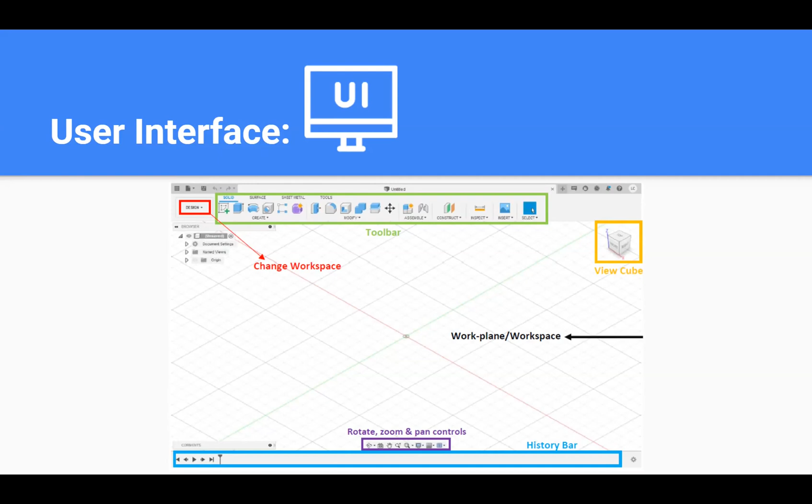Whenever you do something new in Fusion 360, it saves it, so you can always go back to see what you've done in the past. This entire user interface will make more sense once we get started working on our model together.

Fusion 360 has folders and projects, which is how you save your files. The great thing about Fusion 360 is that you can work with multiple people on the same model at the same time, which is perfect for our design-a-thons. If you're working with friends, you can all work together on the same model by saving it into the same project. We'll go over that later today.

If you've never done any 3D modeling before, it's very helpful to follow a step-by-step process so you can efficiently create the models you'd like for whatever design you're making. The great thing about 3D design is there's no one way to do it, but if you want to get started, I suggest following this little algorithm.

It starts with first creating sketches. The next thing is dimensions. Third, we have extrusions, then cutouts, and lastly, colors and appearances. We'll go through each of the 5 steps in this algorithm together through the slides, and then put it into practice later.

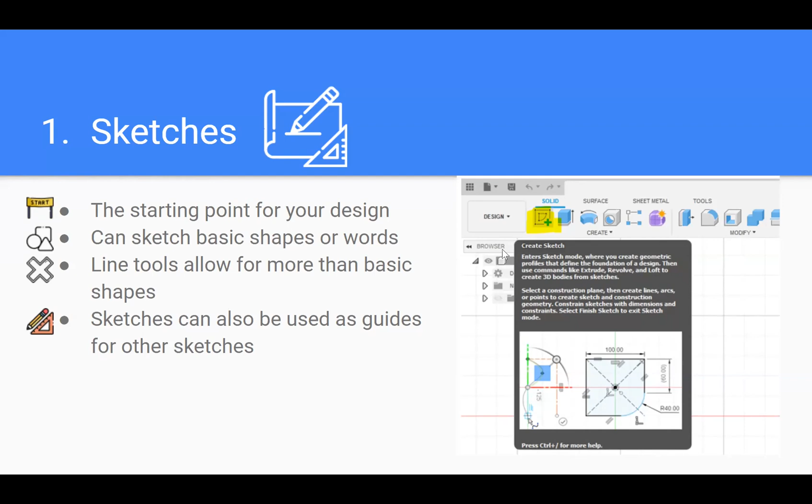Here you can take a look at the different shapes in the drop-down menu, and we'll see more when we work on our model.

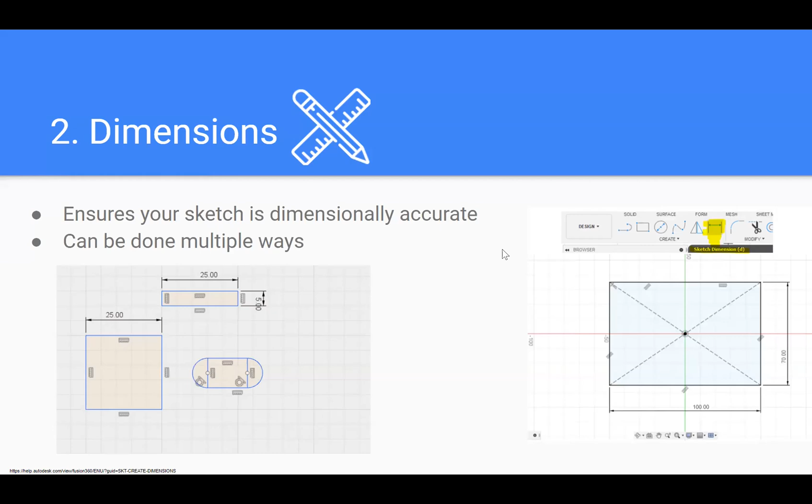So the second step in the algorithm are dimensions. Dimensions make sure that your sketch is dimensionally accurate. There are various ways you can work on dimensions, and I'll show you the most straightforward and intuitive way. If you have to design something that is a specific size, you will define the dimensions - the length, the width, and the height - using the dimension tool. So you typically dimension your sketches and then move on to the next step afterwards.

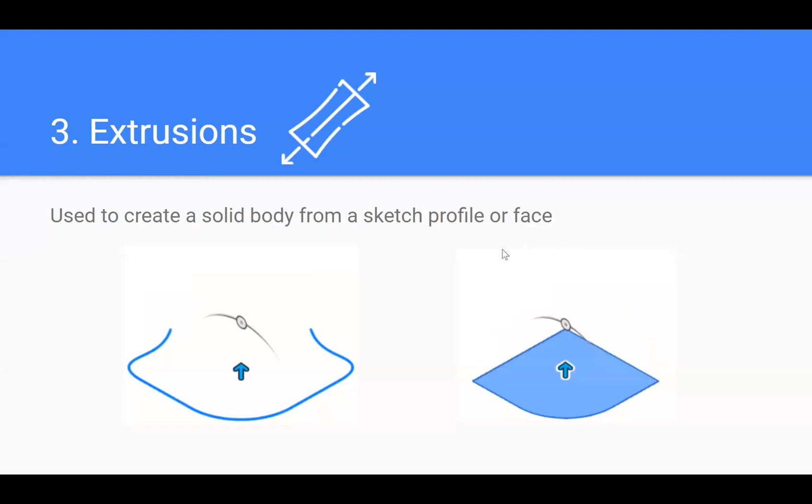So the next step are extrusions. Extrusions allow you to create a body from a sketch. We started with our sketches, we dimensioned them so that they were accurate, and now if we use the extrusion function, you'll be able to create a body from it. For example, if you're extruding a square that you sketched, you would create a cube or rectangular prism once you use the extrusion function. You can see in the animation here how that works.

There are sketches on both the right and on the left, and the body is being created.

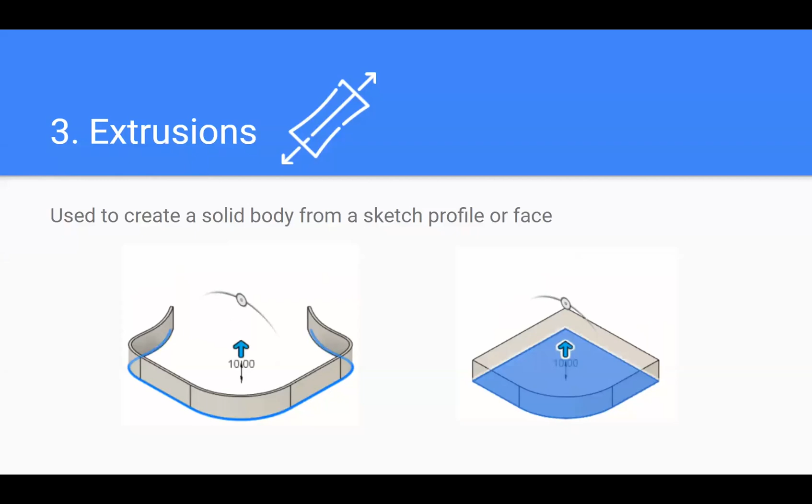The great thing with Fusion 360 is that it's pretty smart in the sense that if you put in certain values, it's able to adjust everything for you, so you don't have to worry about dealing with all of these different types of operations.

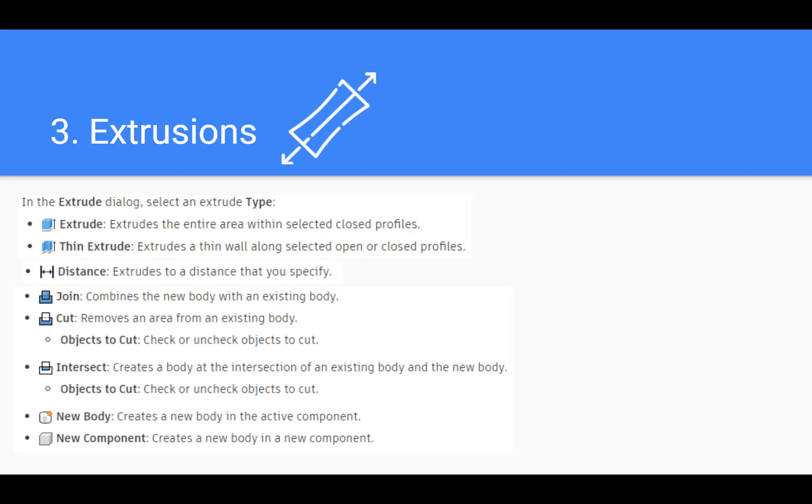The next thing are cutouts. Cutouts do the opposite of what extrusions do - while extrusions build up a body, cutouts remove portions of the body. When you use the extrusion function, you usually use a positive value to make your body grow, but because we want to remove parts of the body we've created, we use negative values. There's also an operation called cut, which allows you to remove bodies - we'll see more of that later on. For example, if you wanted to make a cup, you would first extrude a cylinder shape, and then cut out a smaller cylinder in the middle.

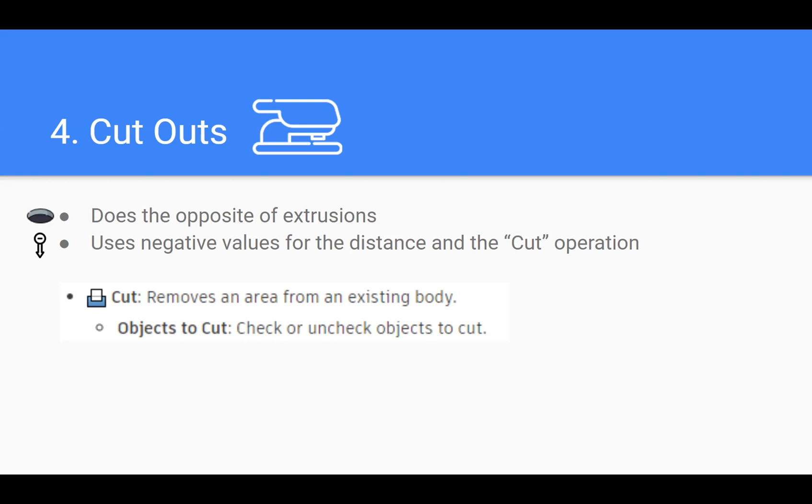And then the very last thing are colors and appearances. Fusion 360 allows you to change the color of whatever you design, and not only can you change the color, but you can also change the material. You can have a standard plastic type of material in any color you'd like, or you can choose various different types of metals, or wood grains. You have a ton of options so that your design can look more realistic and visually appealing. This is also great to know for our design-a-thons, so you can stand out from everyone else with a nice visually looking model for your design.

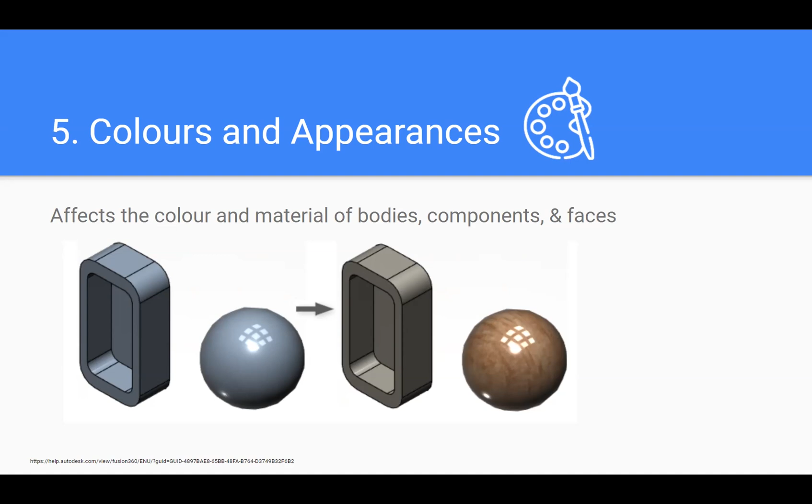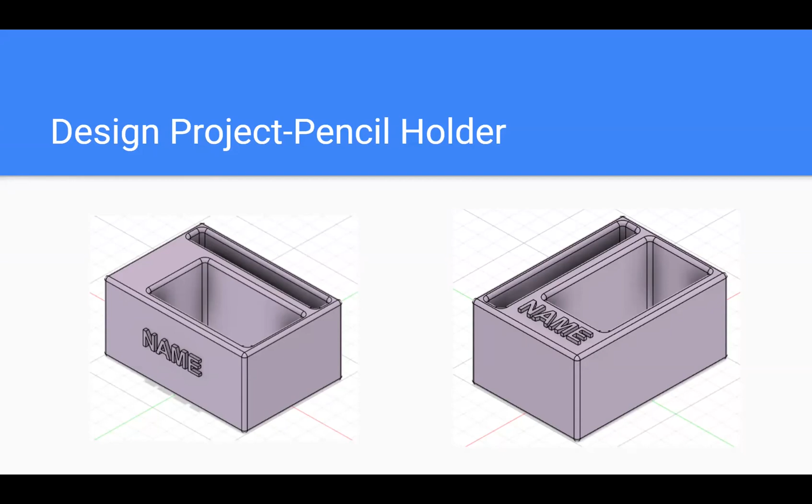So we went over a brief introduction of some of the key functions you'll need when creating your designs. Now we will get started on working on our design project. We'll be implementing all of the steps we covered so that we can create our models, and then you can start practicing and get more experience with using Fusion 360. So if you can open up Fusion 360, we'll get started. I'll give you all about a minute and a half to get everything opened up, and then we can get started.

All right, so let's get started on working on the design project. If at any point you want me to slow down, just let me know in the chat, or if you want me to repeat a step, I'll be more than happy to slow down and go back so you can understand exactly what we're doing. So here you have your Fusion 360 opened up. You should be able to see my workspace as well. If you're having any difficulty seeing it, just let me know in the chat and I can correct that.

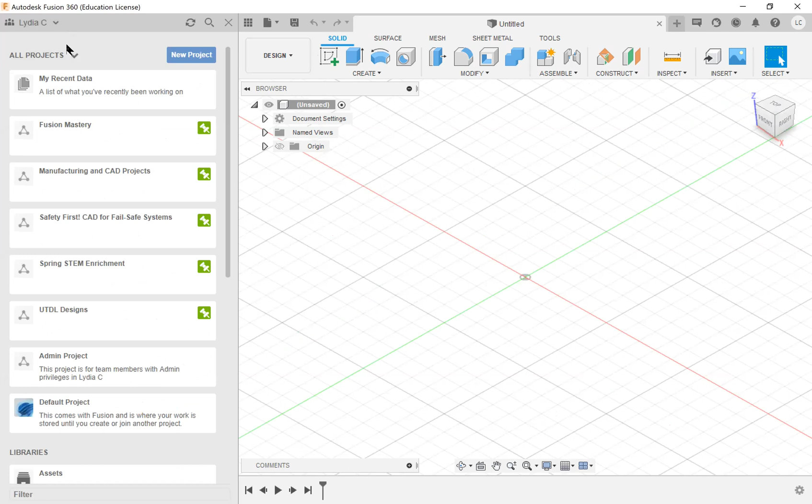So what we'll start with is creating our projects. Click on the 3x3 dots in the top left-hand corner, and you'll see a list of different projects. Click on new project, and that will create a new project.

You can title it whatever you'd like. So if you're working on the design-a-thon, you might call it that, so you can put all of your design-a-thon related things in that project.

Once you've created your project, click on X and it will take you back to your workspace. So once again, I clicked on the 3x3 dots in the top left-hand corner, clicked on new project, and then it prompted me to give it a title. I gave it a very simple title, and then I pressed X to close this panel.

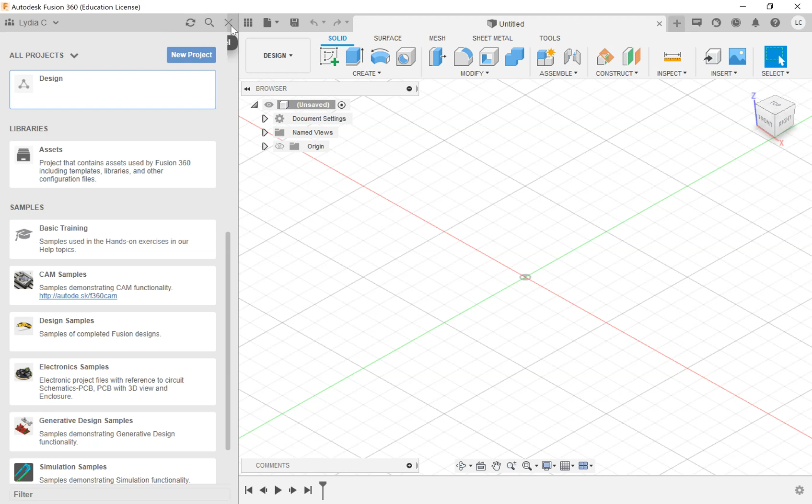Okay, so the next thing we're going to do is save our work. I like to save after every step, or maybe every 20 minutes of working. Just like with a Word document, you want to make sure you always save your work so that you don't lose anything. Fusion 360 is great because a lot of your work saves on the cloud, but I always like to be extra safe and save my work as well.

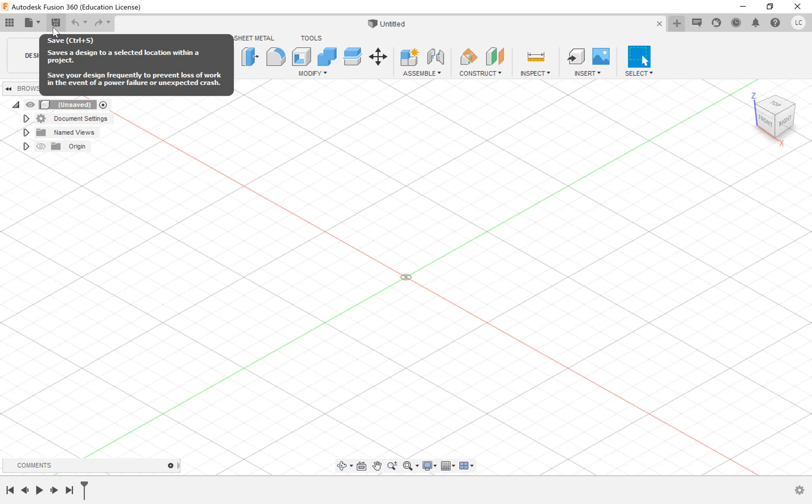So if you click on save, it'll ask you to give your design a title. We'll be designing a pencil holder, so you can just call it pencil holder or anything that you'd like.

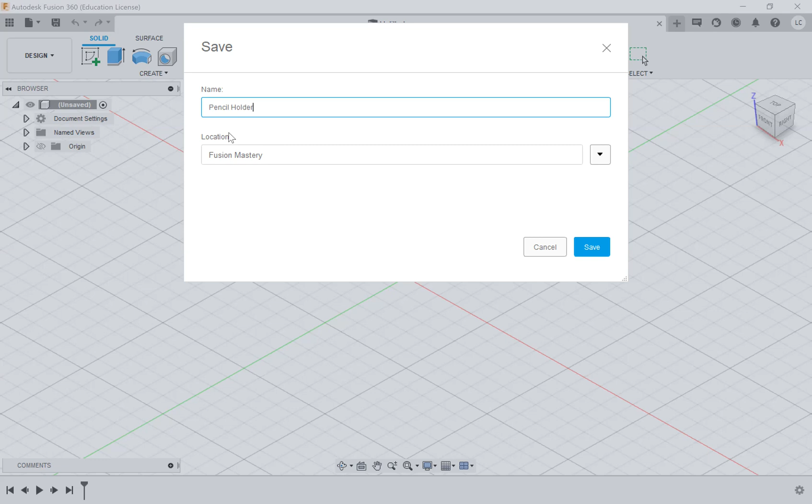After you give your project or design a name, it will ask for the location. You can click on the drop-down arrow that my mouse is hovering over, and you'll see all of your projects. I'll click on the project we just created earlier, and it will save that work to that project. Then I'll click on save.

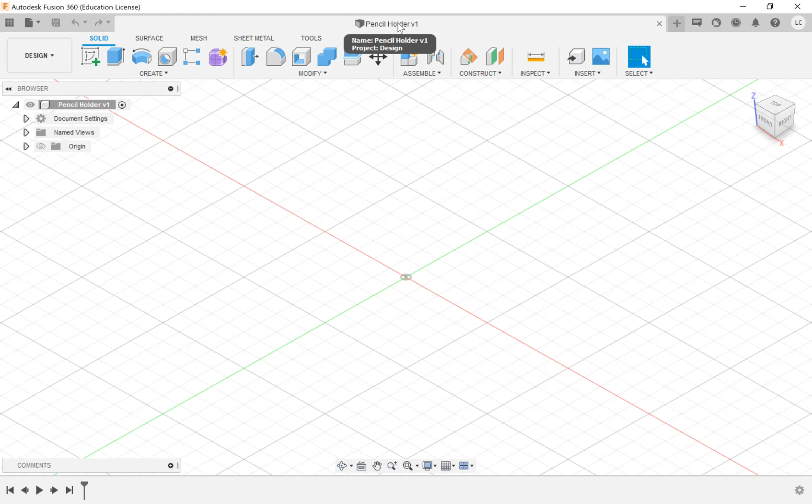You'll notice that now you have the name of your design, and then something that says V1 - that just means this is your first version. Every single time you save on Fusion 360, you get a new version of your work. And the great thing is that if you deleted something in version 1, but now you're in version 5, you can always go back to the previous version to get back the work you did earlier on.

All right, so now let's get started with making our model. Once again, if you have any questions, just let me know in the chat. So the first thing we're going to do is create our sketch, because that's step 1 in our algorithm.

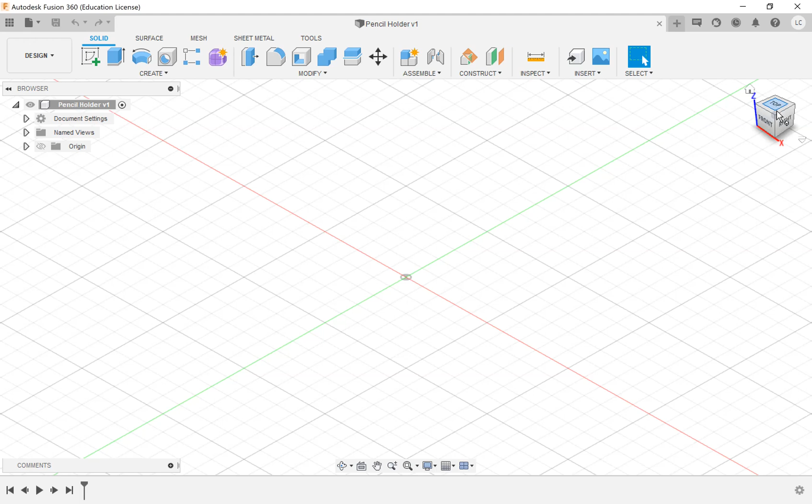So what I'll do is click on top view. When you create a sketch, you want to choose a plane on your workspace to sketch on, so I'm going to choose the top view. You'll see that now your entire workspace gets reoriented.

Now what I'll do is click on create sketch - that's the plus sign right over here that my mouse is hovering on beside the word design. If you hover your mouse over it, it will say create sketch, and give you a description of exactly what this command does. So we'll just click on that.

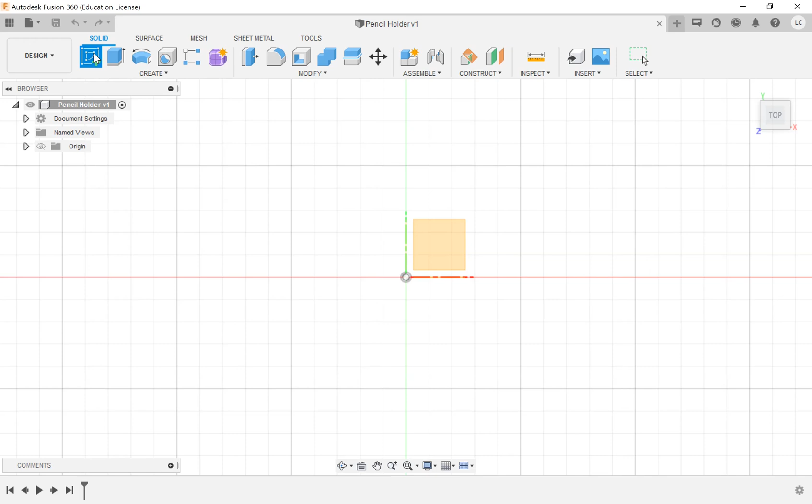So once again, I've just clicked on create sketch under the create menu. And then I will select this square that shows up on my screen. Selecting this just reassures that I'm actually going to be sketching on the top view.

Okay, so now you can see all the various shapes that we can sketch out. If you click on the create drop-down menu here, you'll be able to see more shapes that you can also sketch out. And within each shape, you have various options. Even though there are descriptions for each of the various types of options - if we take a look at rectangles, there's different types of rectangles you can sketch out.

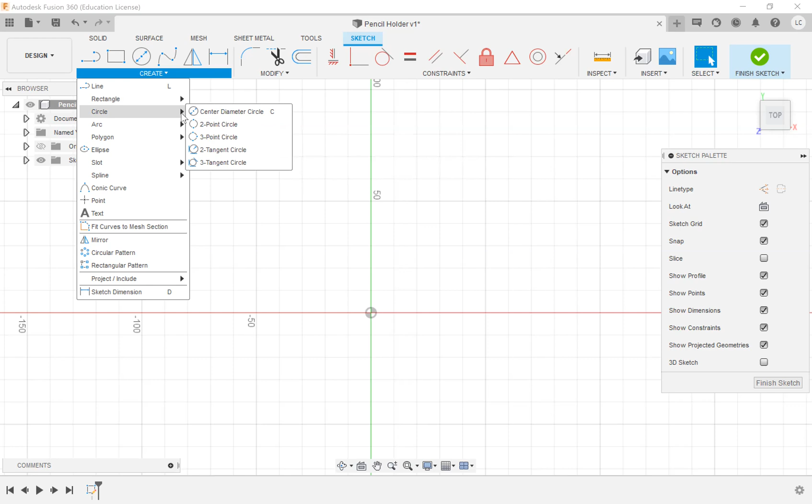The best way to actually understand fully how each type of rectangle works is to just try them out. It takes a little bit of practice to figure out which one works best, but once you figure that out depending on the scenario, it becomes really quick from there on. So I suggest that after this session, you go back and work on creating the same model, testing out different shapes and variations within the shapes, just so you can get familiar with it.

So I'm going to use the center rectangle for this. I'm just going to click on center rectangle, and then I'm going to click on the origin. It's very important that when you're creating any design in Fusion 360 that you start at the origin so that you can lock your design in place on the workspace.

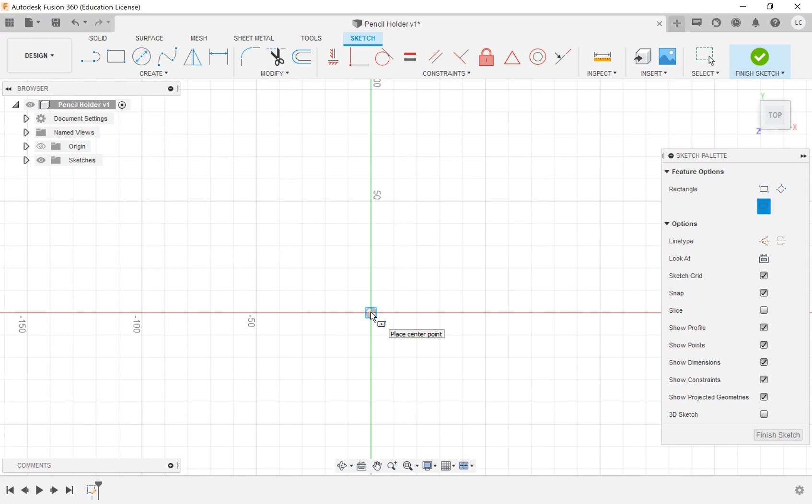So once again, I just went to the create drop-down menu. I hovered my mouse over rectangle and clicked on center rectangle. Now I'm going to hover my mouse over the origin, which is the intersection of the green and red lines, and I'm going to click once, extend my mouse out a little bit, and then click again to secure it in place.

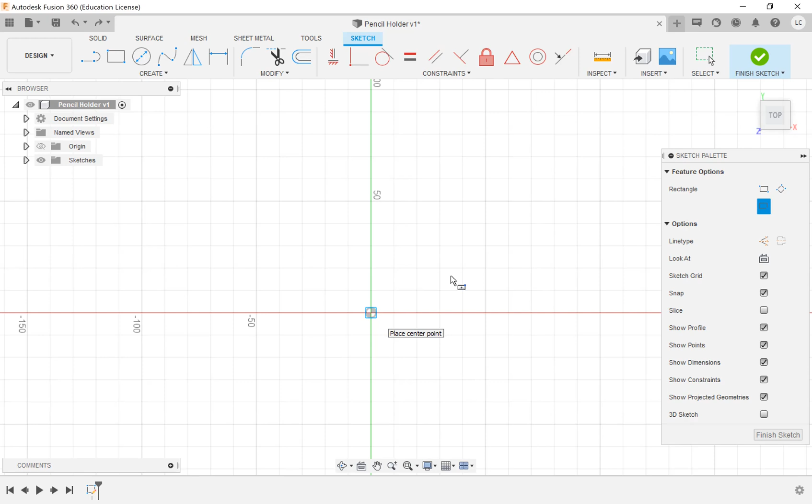So I'll do that again. Create rectangle, center rectangle, click once in the origin, drag my mouse out a little bit, and then click again to secure it in place.

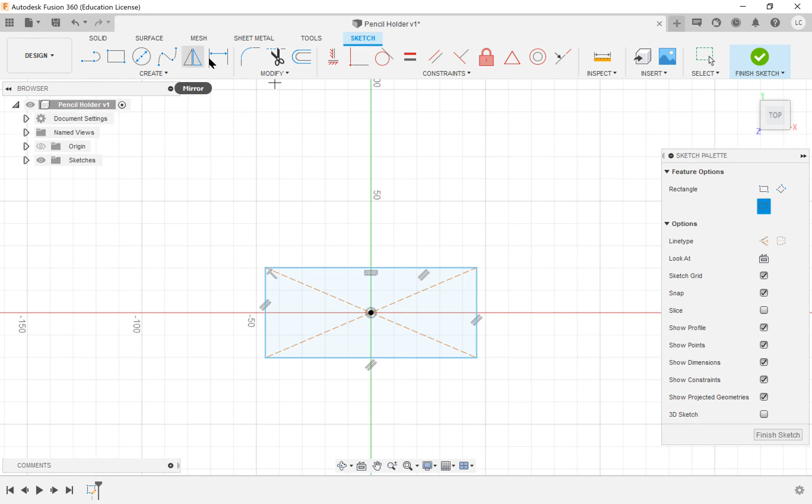Now what we want to do is step 2 of our algorithm, which are the dimensions. So what we will do is click on the dimension tool. If you hover your mouse over, 1, 2, 3, 4, 5, 6 spaces away from the first function over here, the line tool, it will say sketch dimensions. Hover your mouse over it, and we're going to click on that. This is the dimensioning tool, and it will give your design the dimensions that you want.

So let's first work with defining this side length over here. What we'll do is click once, drag our mouse out a little bit, and click again. Now we want our pencil holder to be 90 millimeters, so all we will do is type 90 and then hit enter on our keyboard.

So once again, I clicked on the sketch dimension tool. I clicked on the side length that I wanted to dimension, dragged my mouse out a little bit, clicked again, and then typed in the value of 90. Fusion 360 automatically has the dimension set to millimeters, and if you want to change that, you can always change it in your settings.

Now let's dimension this side length. Our sketch dimension tool is already selected still, and you know that because it's highlighted in blue. You can always click it again if you want to be sure. So once again, you'll click on the side length you want to dimension, drag your mouse out just a little bit, and then click again. And this side length, we want it to be 90 as well.

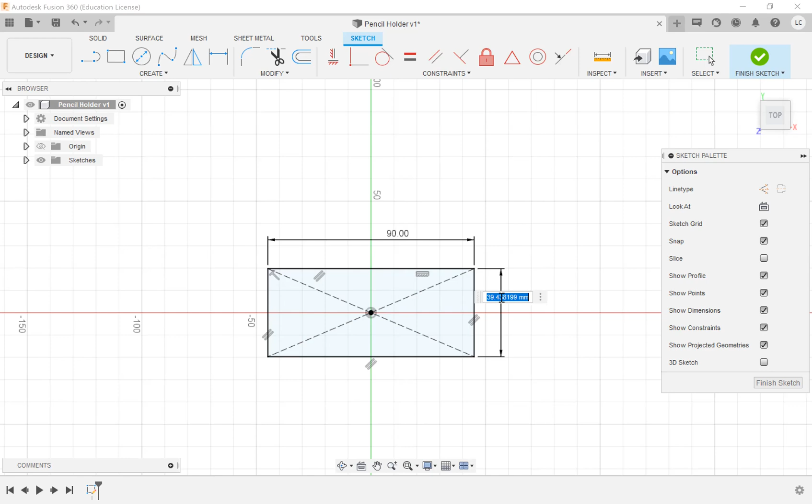If you want to ever change any of your dimensions, you can always double click and change the values if you'd like. So if you want it to be a little bit wider, let's say you want it to be 100, you can change it to be 100. And if you wanted this to be 70, or you want it to not be as far out, you can also change that as well.

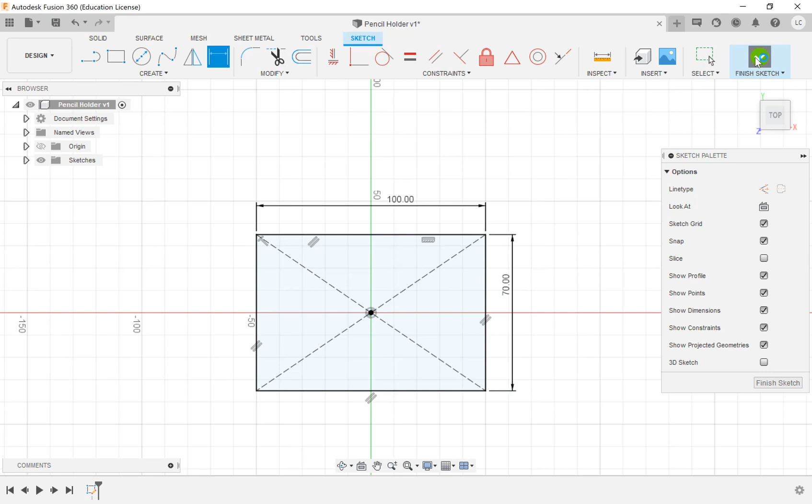So you can change the values to this, or you can keep them as you originally had them. I just want to show you how you can change your dimensions so that it better fits exactly what you're trying to make. Once you're done adding your dimensions, you can just click finish sketch.

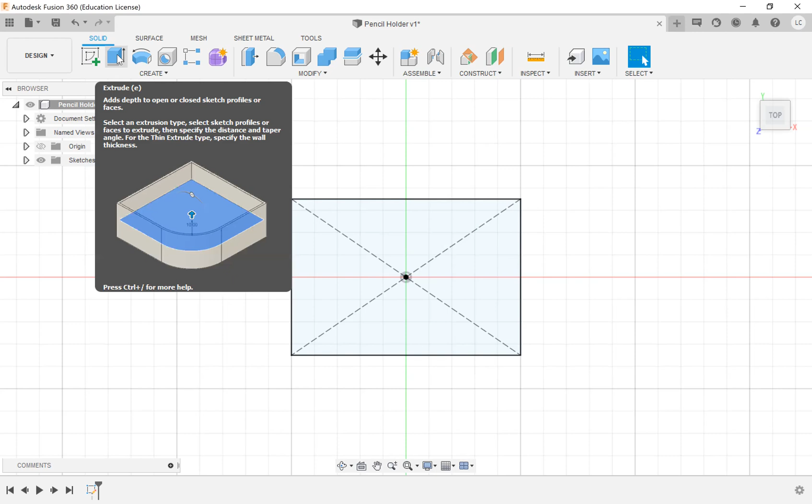So now we've completed the first 2 steps of our algorithm, and the third step is to extrude. You can do that by clicking on the extrude function right beside create sketch. You can see that same animation that I showed you earlier appear, along with a description of exactly what an extrusion does. So let's click on that.

Now our sketch has already been selected. However, if your rectangle that you sketched out is not blue, just click on it and it will select it. Now we want to make our actual body, so we will give this a specific distance.

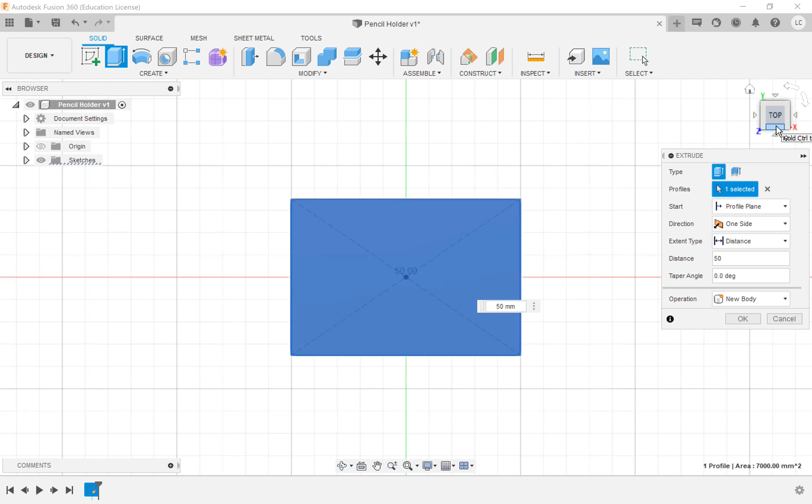So let's extrude this out to about 50 millimeters. Just type in 50. And if you want to see how that looks, you can click on the view cube and move it around to see if that's the height you'd like it to be. If you're given a specific value, you can use that as well.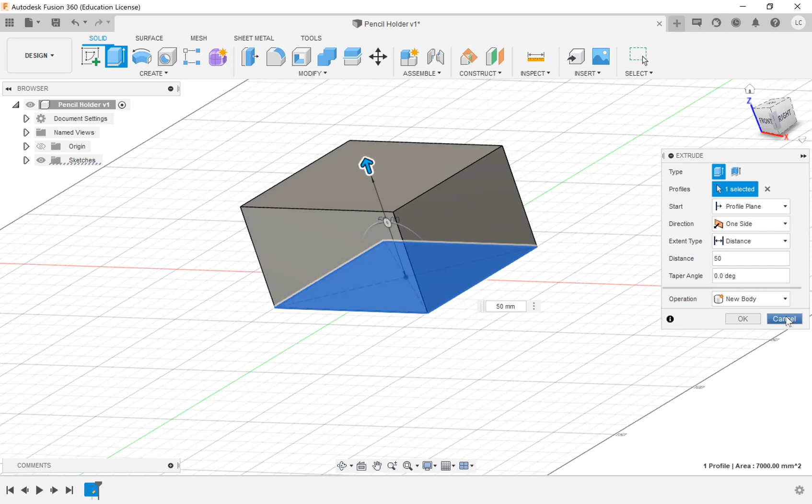Once you've typed in your value and you're good to go, just click OK. So once again, what I did was go to extrude. My sketch was already selected, and then I changed the distance in the menu to 50 millimeters, and then selected OK.

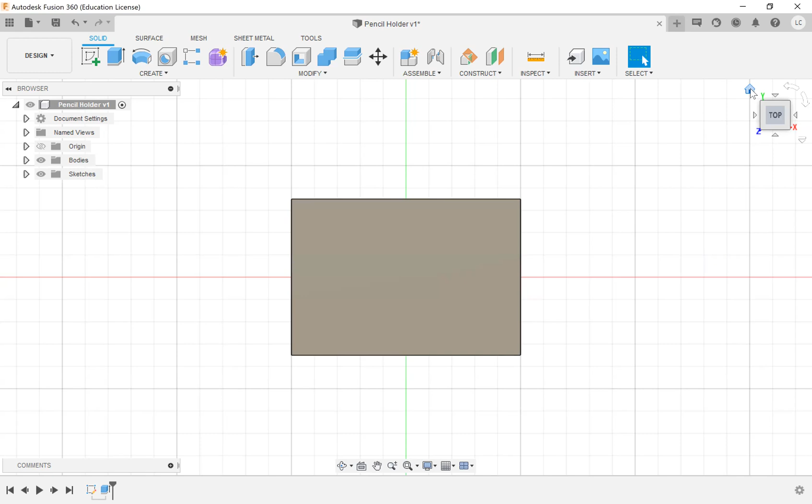And if I want to see this in a view that gives you more detail, just click on the home button beside the view cube. And now you can see everything from a better angle.

So let's save what we've done so far. Let's click on save. It'll be the same floppy disk icon you're familiar with from Microsoft Word and PowerPoint. Fusion 360 will ask if you'd like to give it a description. This is helpful if you're working with other people, since they might want to know what's significant about this version of your model. But if you're just working by yourself, you can keep it as user saved.

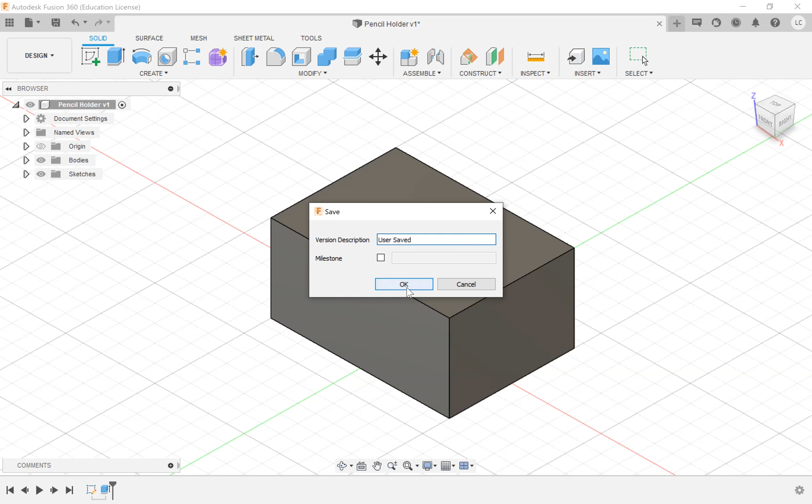Before we move on to our next step, let's take a look at our history bar. I mentioned at the beginning that there's a history bar showing all the different functions and steps you worked on to create your model. Here at the bottom, you can see a sketch feature showing we created a sketch first, and then an extrusion icon showing we did an extrusion next. This will continue to grow as we do more steps.

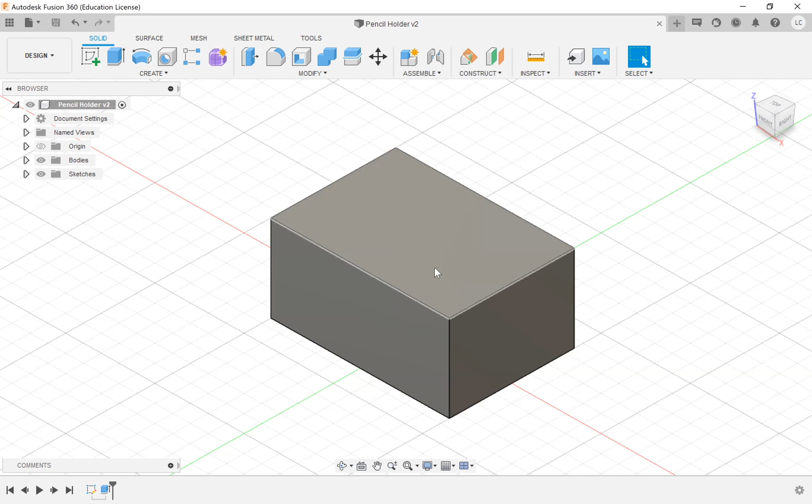So to create the pencil holder I showed earlier, there were some cutouts. Let's create the cutouts together. What we'll do is click on the top face, since that's the surface we want to sketch on, and then click on Create Sketch again.

You can sketch multiple times when creating designs—it doesn't have to be just at the beginning. Usually steps 1 through 4 of the algorithm, you go back and forth until you complete your design, and then you typically do step 5 last. So we're going back to creating a sketch so we can create cutouts.

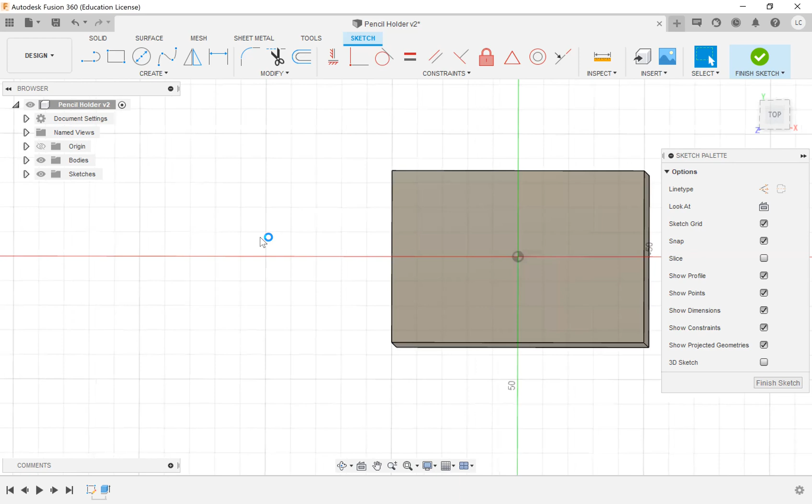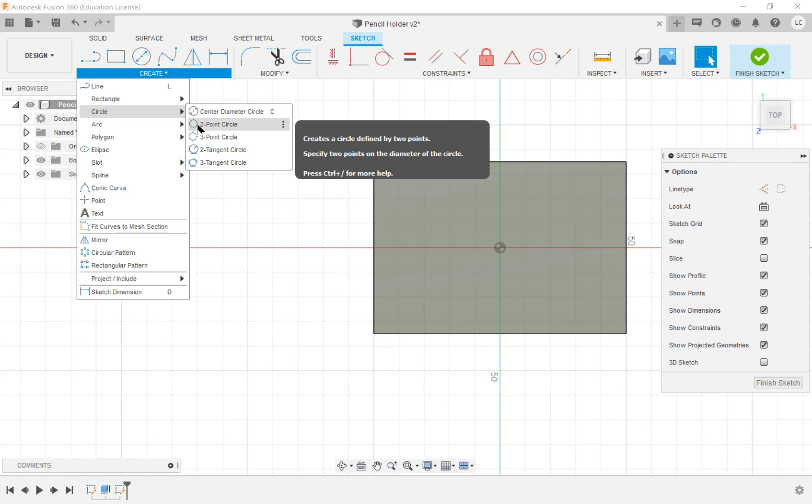So once again, I selected the top of the rectangular prism and clicked on Create Sketch. I want to make rectangular cutouts, so I'm just going to click on the rectangle tool. You can also explore more shapes if you're interested—if you want circular cutouts, feel free to do that as well. But I'm just going to do basic rectangular cutouts.

So I'm going to click on this 2-point rectangle, and I'm going to place 2 rectangles on here, so I have 2 cutouts. I'll click once, drag my mouse out a little, and click again. My rectangular sketch feature is still locked in, as you can see it's still highlighted blue, so I'm going to make another rectangle over here.

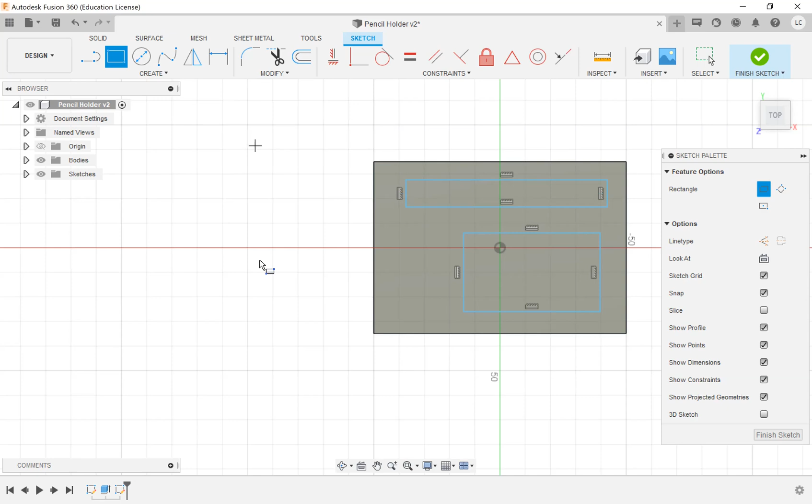Now to get rid of this rectangular sketch feature, since I no longer want that, I can either go straight to dimensions if I want to dimension my rectangles, or I can press escape on my keyboard, and it will release me from having to continue making rectangles.

So now you can dimension these rectangles to specific sizes if that's important, or you can skip that step if dimensions aren't significant here. I'm going to do a few dimensions so we can get more practice using this tool.

I'll click on Sketch Dimensions again. I want this rectangle at the back of my pencil holder to be equal distances away from the edge of the larger rectangular prism we extruded earlier. So what I'm going to do first is click on one edge of the rectangle that I just sketched.

And then I'll click on the edge of the rectangular prism. Now I'll drag my mouse out and make each side have a distance of 1 centimeter, so 10 millimeters away from the actual base of our pencil holder. I'll type in 10 and press enter.

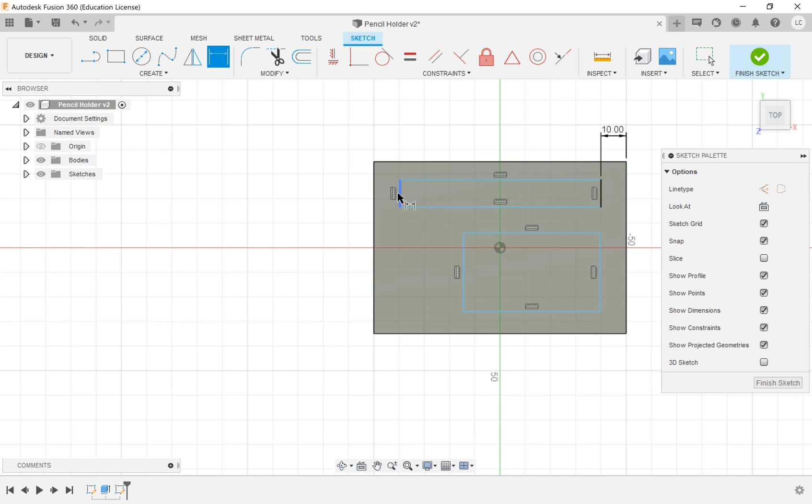Once again, I clicked on sketch dimension. I'm going to click on the edge of the rectangle we just created, and then the edge of the rectangular prism. Drag my mouse over, click again, and then type in 10.

Alrighty, so if you want me to go back and show that again, feel free to let me know. It doesn't matter which side you click on first. Yeah, that doesn't matter at all. That's just what I ended up doing, but the order that you click for creating your dimensions does not matter.

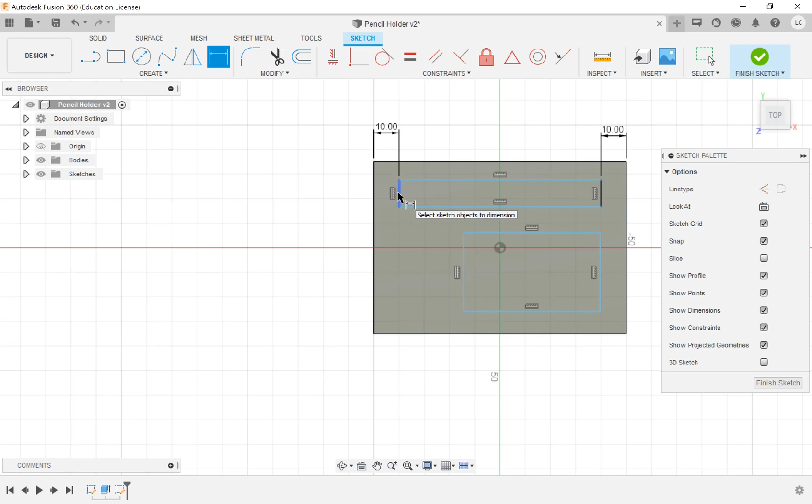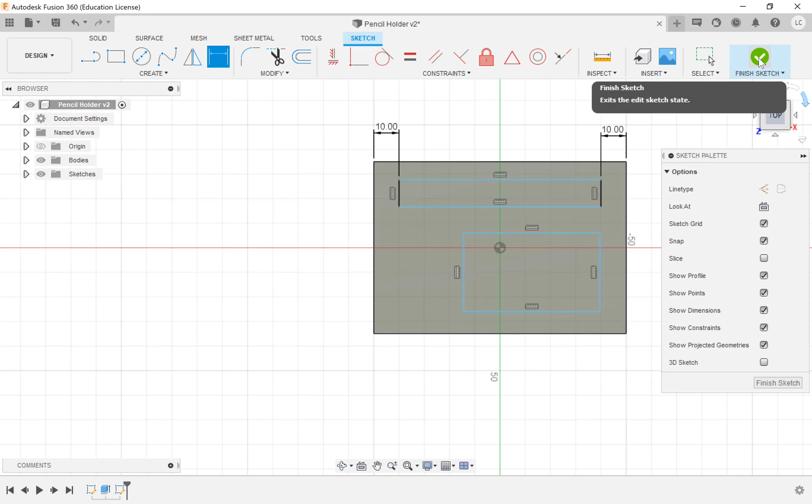All right, so I think I'm okay with leaving the other rectangle the way it is, but you can dimension all of these edges if you would like to, just so that you can have a neater pencil holder with equal distances away from the actual base of it, if that's something that's important. Because I am done creating my sketches and dimensioning, I'm going to click on Finish Sketch. And then I'm going to save my work again.

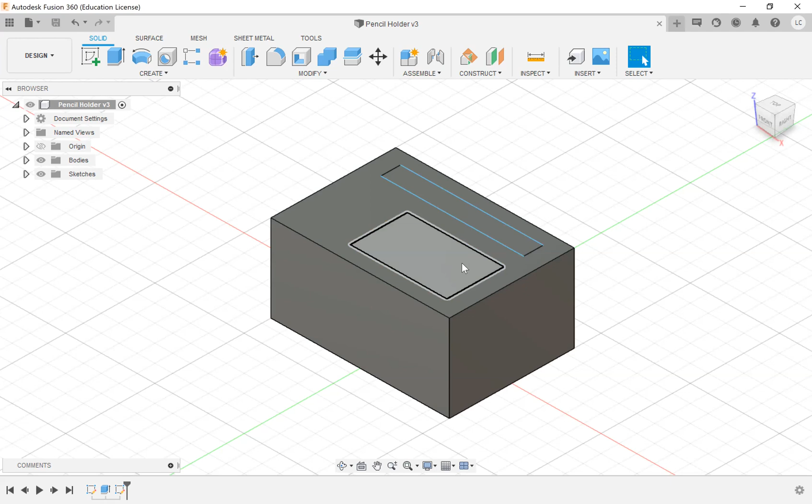Now what we want to do is cut out these rectangles that we created so we can actually store things inside of our model. So what we'll do is click on Extrude. And we need to select exactly what we want to extrude.

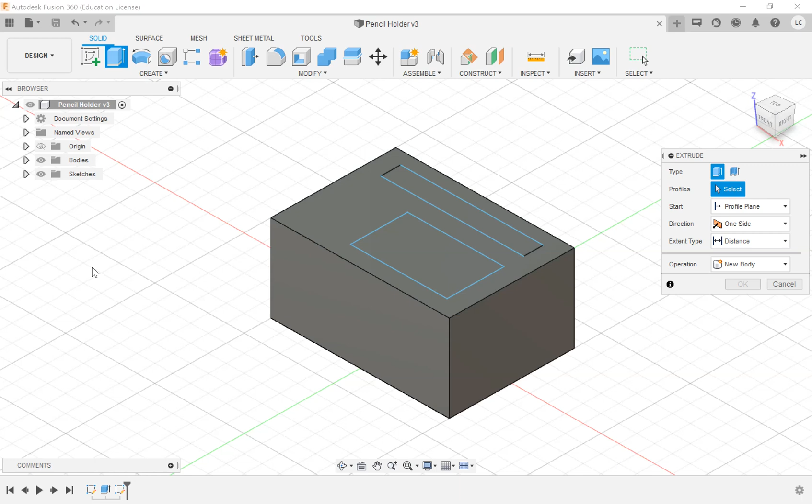We actually want to cut the parts out, but if you recall from earlier on, I mentioned that it's similar, you still have to use the extrusion feature, but we will change the values and the parameters so that Fusion 360 knows that we want to create a cut. So the profiles I will select are the rectangles we just sketched.

And then I'll change the distance to a negative distance, so I'm going to change the distance to -35. Now you can see that the arrows are now facing downwards. They were originally facing upwards, and you can kind of see through your model and see the cutout being formed.

You'll also see that the operation here changed to cut. It was originally at new body, but as soon as you put in a negative value, Fusion 360 is kind of smart, so it's able to figure out that you want to cut something out or create a cutout. If for whatever reason that did not happen when you changed your values, just click on the Operation drop-down menu and select Cut. So I'll do that once again.

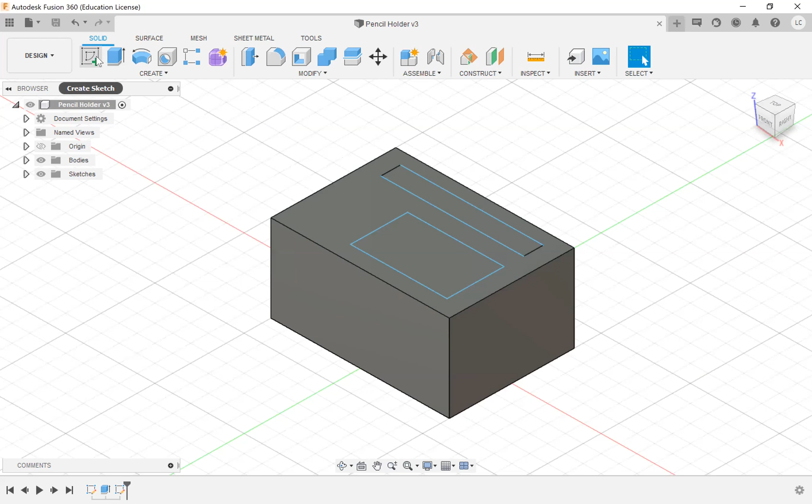I'm going to click on Extrude, which is beside the Create Sketch icon. I'm going to select the rectangles we sketched out, just simply clicking on them. And then for distance here, I'm going to change the value to a negative value, and then the operation will change to cut.

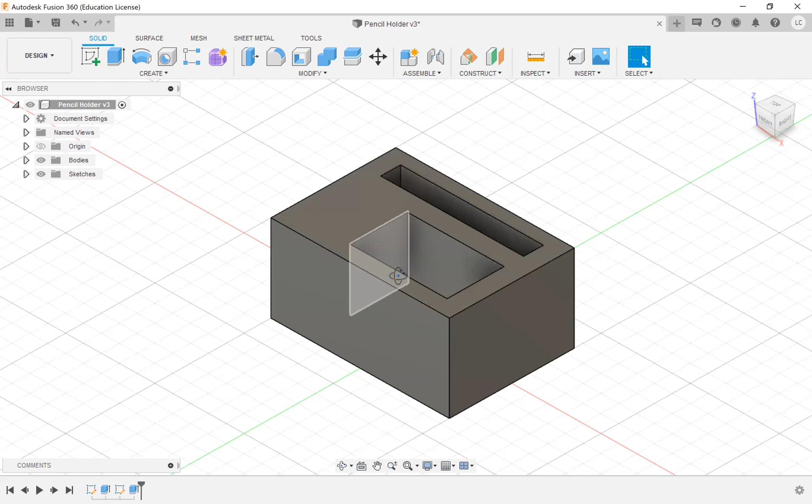Once you've done that, you can click on OK, and now you'll see you have your cutouts. You can click on the cube and rotate your model, and you can see now the cutouts as well.

And now we are almost done with our model. So if you take a look at your history bar, you can see that now you have 2 more items added. It shows that we created a sketch again and that we did another extrusion as well.

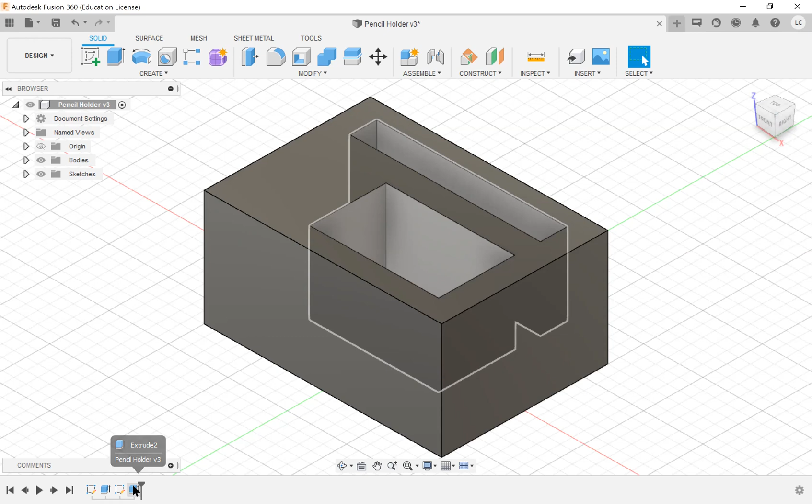If you needed to go back to, let's say for example, you want to make this extrusion or this cut deeper, you can go back to your history, right-click on the step in which you created the cutout, and then you'll see something called Edit Feature. So once again, I right-clicked on the icon relating to the cutout in my history bar, and I'm going to select Edit Feature.

And then your Edit Feature menu will pop up, and so you can change the value. So for example, if you wanted it to be -40, you can do that there, and any other changes that you'd like to be made.

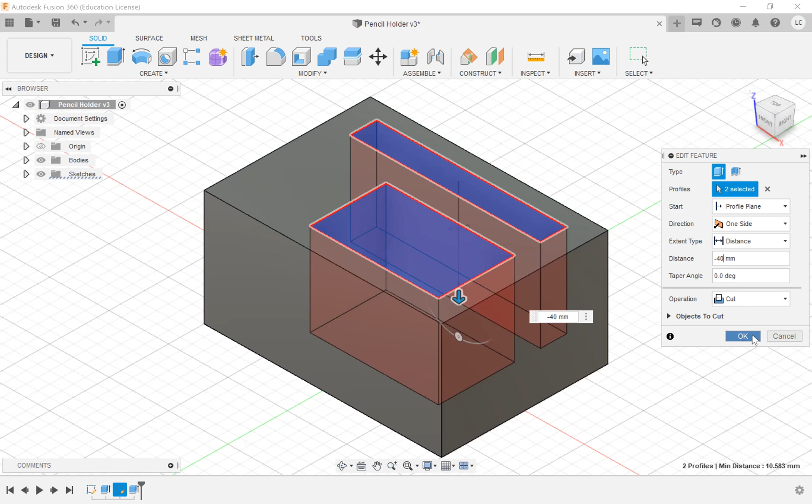All right, so the next thing we're going to do now is sketch your name. You can choose whether you want to use your name or anything else that's of significance to you to be written on your model. So I'm going to do it on this front face over here, so I'll click on that front face.

And as always, we're going to go back to the basis, or the first step, of our little algorithm, and that is creating a sketch. Now I'm going to use the pan feature at the bottom above the history bar just to move my workspace over a bit.

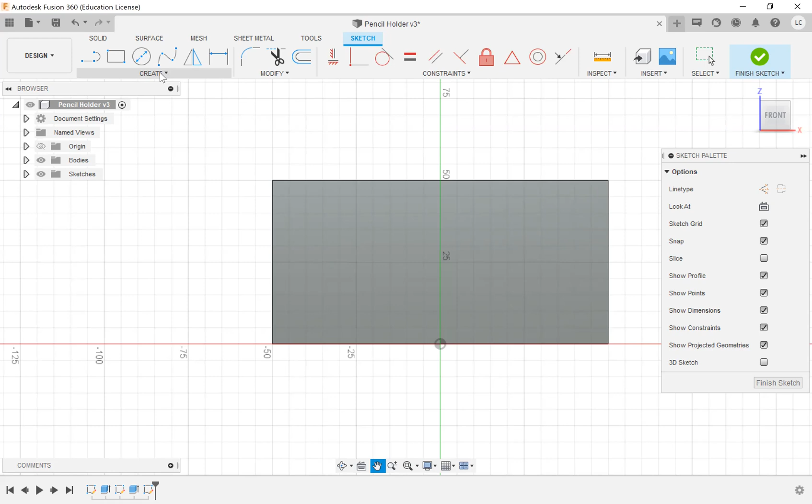Then I'm going to click on the create drop-down menu, and I'm going to select text. So once again, all I did was click on the create drop-down menu, go down a little more than halfway, and click on text.

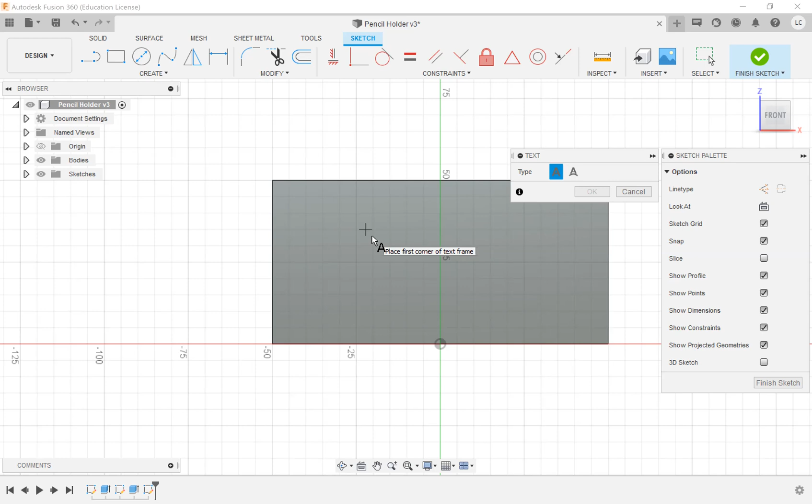Now what I'm going to do is trace out the area where I want to put the text. I'll click once, drag my mouse over a little bit, and click again. Then you can put in your text, whatever you'd like - it could be your name, your initials, or something of significance, maybe the discipline you're in.

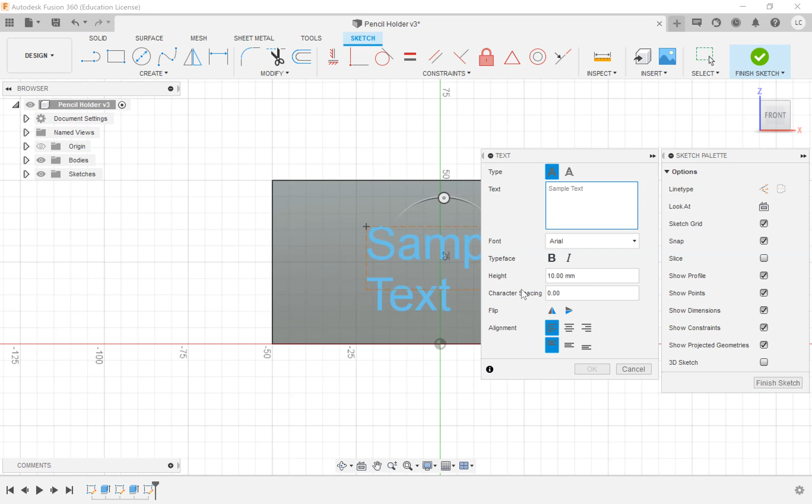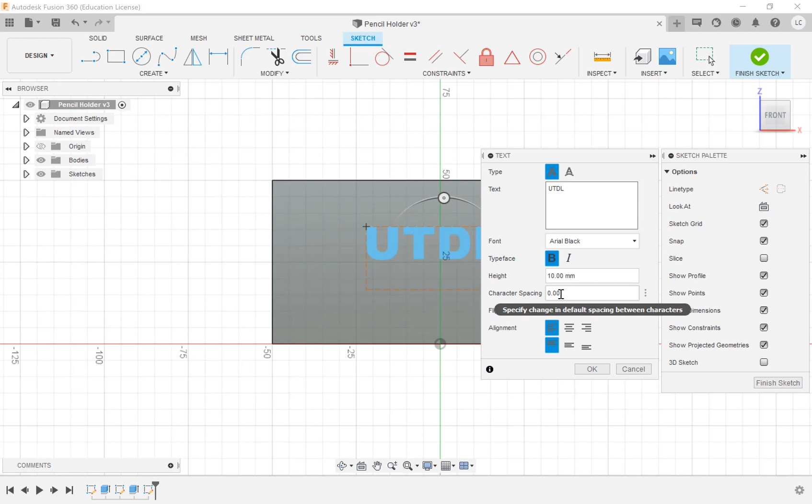And then you can play around with the font as well. It has the same fonts you're familiar with from Google Docs or Microsoft Word. You can change the height of the text, increase the spacing, and move this menu around if it's in your way. You can also choose to center your text a bit, then click OK once you're done.

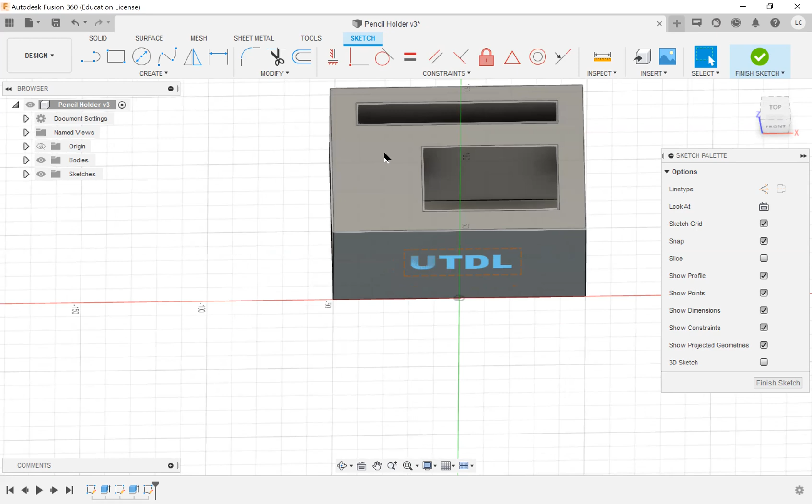Okay, so I'll give you all a few more seconds to play around with the fonts for your text on the front, or you can choose a different surface on your model. If you wanted to put your name on the top surface or maybe the sides, you can do that too. You're not limited in the position in which you can put this.

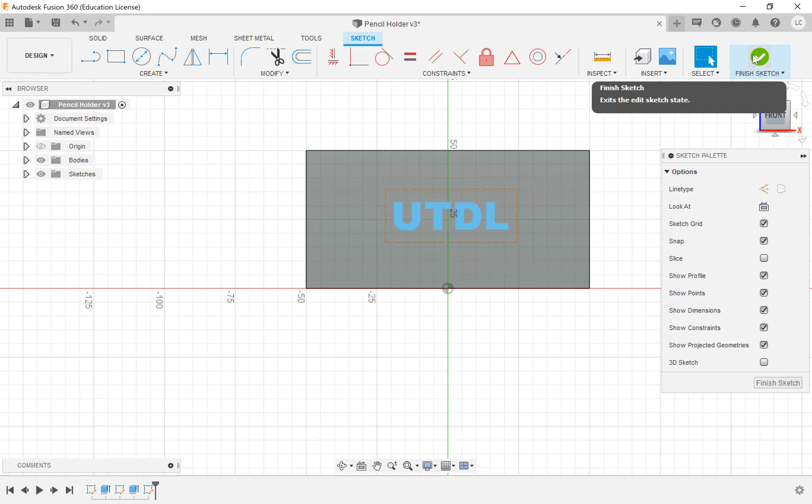All right, so now that you've finished writing the name or saying whatever you chose, you can click on finish. Then we're going to move on to creating the extrusion. As you can see, this is a repetitive pattern starting with sketches, then you add dimensions - in this case, choosing the text size and font - then you move on to extrusions or cutouts, and we'll be approaching our very last step shortly.

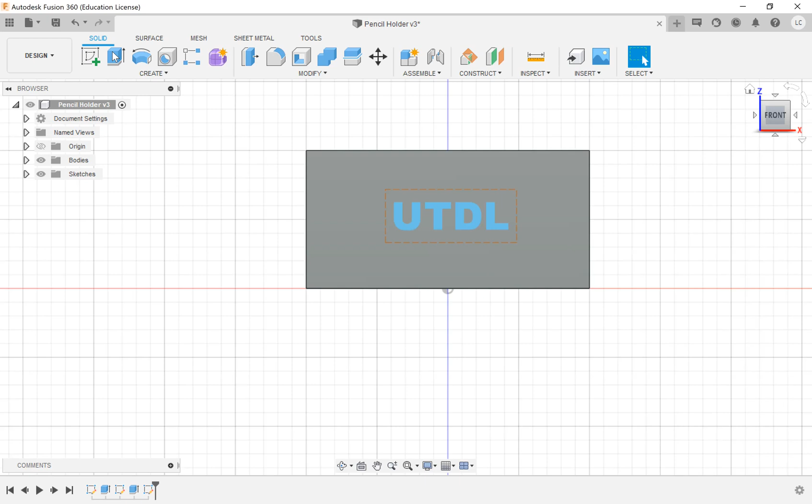So we're going to click on extrude, and then you can choose the distance. What will be helpful is if you use your view cube and rotate your cube a little bit so you can better see what's going to happen with your text. If you want your text to stick out of the model, use a positive value in your distance, something small like 2 millimeters.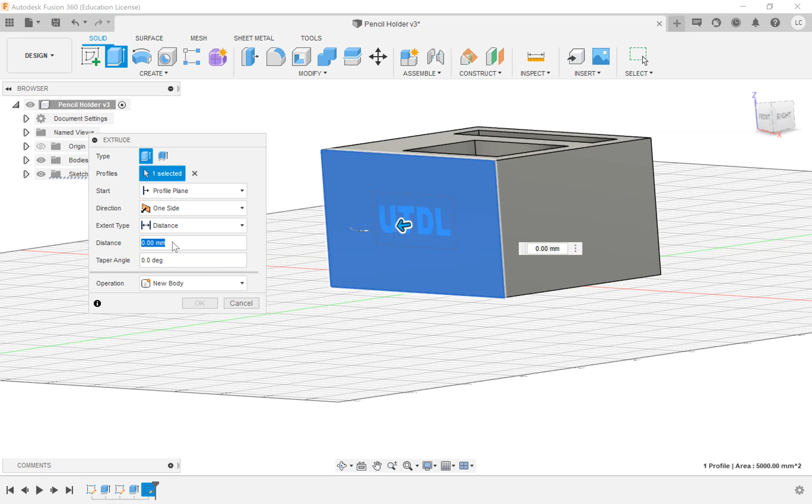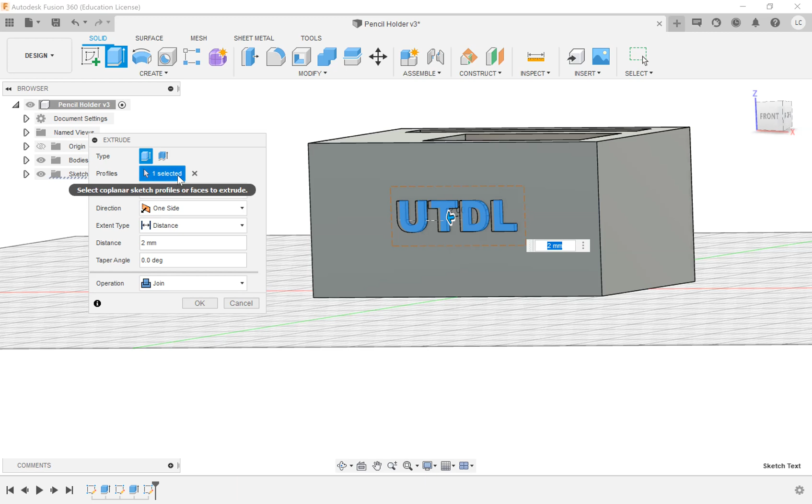Oops, I think I might have selected the incorrect surface, which is very common to happen. So I'm just going to click on the X to unselect that and make sure I select only my text. If you ever realize you selected the incorrect surface, like what I did, just click on the X beside what you have selected and ensure you click on the correct thing.

Okay, so if you'd like your text to stick out, you'll choose a positive distance value, and you can see the operation automatically goes to join, so your text will be attached to the pencil holder. Or if you want your text to be engraved, you can use a negative value. For me, I want the text to stick out, so I'll use a positive value, but you can also see once you put in a negative value, the operation changes to cut, since this is an example of a cutout.

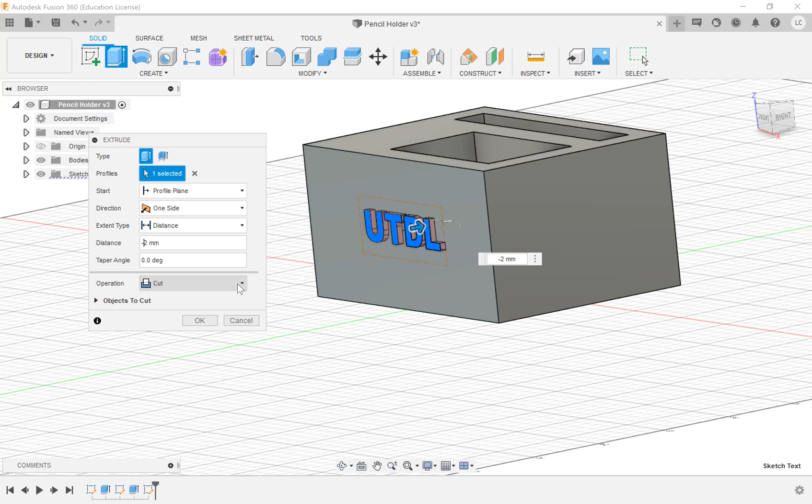All right, so I'm going to click on OK. I'm going to go back to my home view by clicking on the home beside the view cube, and then I will click on save. Once again, it's going to ask for a version description, and I'm just going to leave it as user saved, but if you're working with multiple people, I suggest you put a more detailed description.

Okay, so now let's move on to the fifth step of our algorithm. That is changing the appearance and the color.

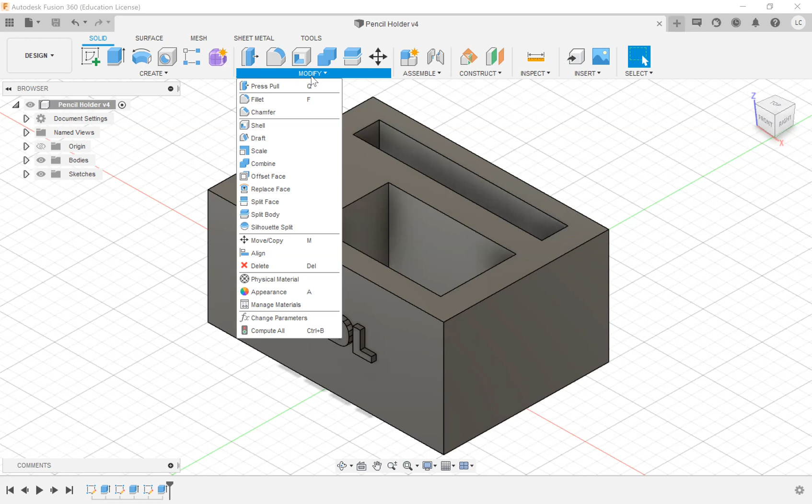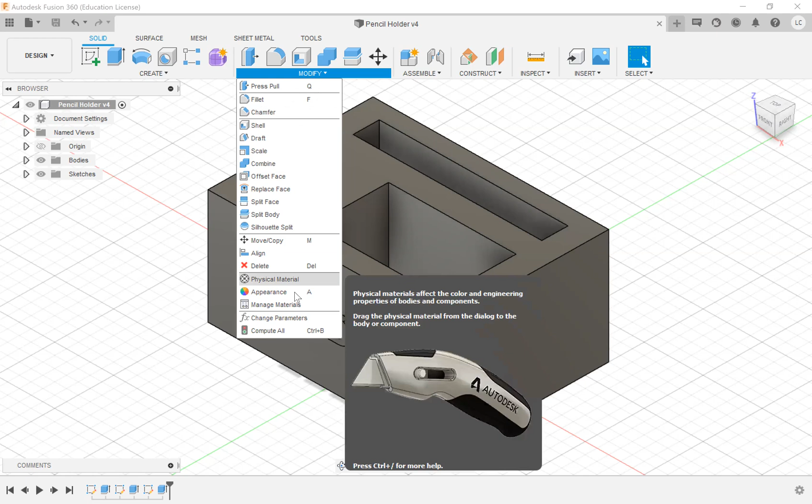So what you'll do is click on Modify, that's beside the Create menu, and then click on Appearance. So in case you missed that, I clicked on the Modify menu, which is beside Create, where we spend most of our time, and then I selected Appearance. Appearance is near the bottom of the menu, and it has a color wheel beside it.

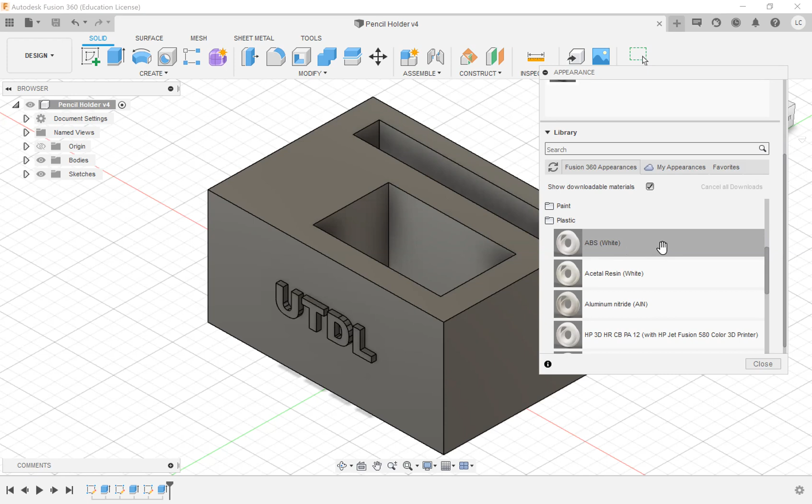An appearance menu will come up, and you'll see there are a lot of different types of materials and colors you can choose from. I'm going to go with a plastic. When you select your material, you click on it and drag it over to your model, and you can see there's been a change.

So if you don't want to do a plastic and you want to do wood, you can open up the wood folder, and then click and drag over the wood finish that's of interest to you.

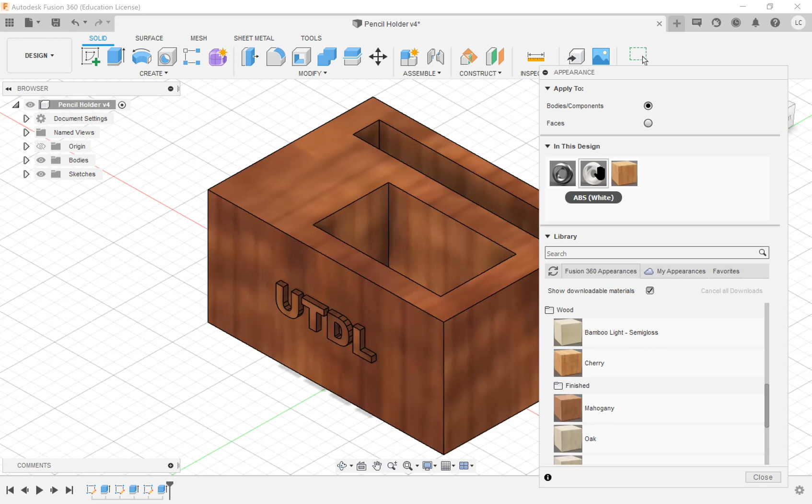The reason I decided to go with the ABS plastic was because I want to be able to change the color, and it's easier to do that with a white base. So what you'll do is right click on the ABS white, or whatever finish or material you added to your model.

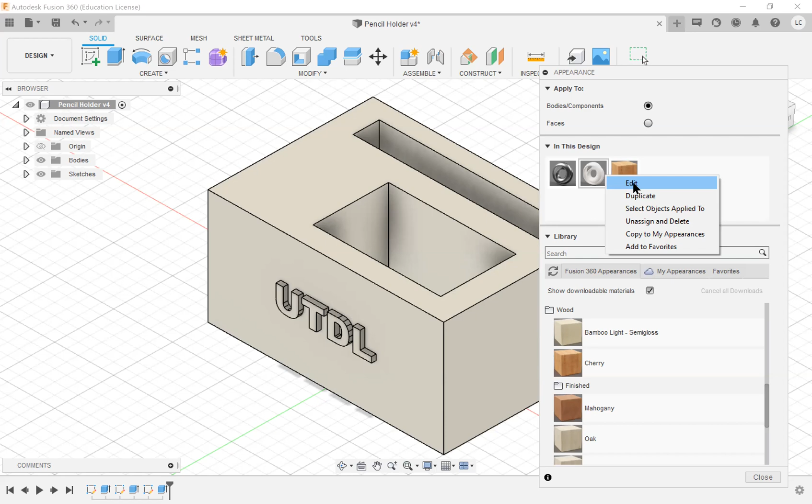You'll be able to change the colors by clicking on edit. So once again, I right clicked and then selected edit. Now you could play around with the colors and choose whatever you would like. Then you just click done once you're finished, and then click on close.

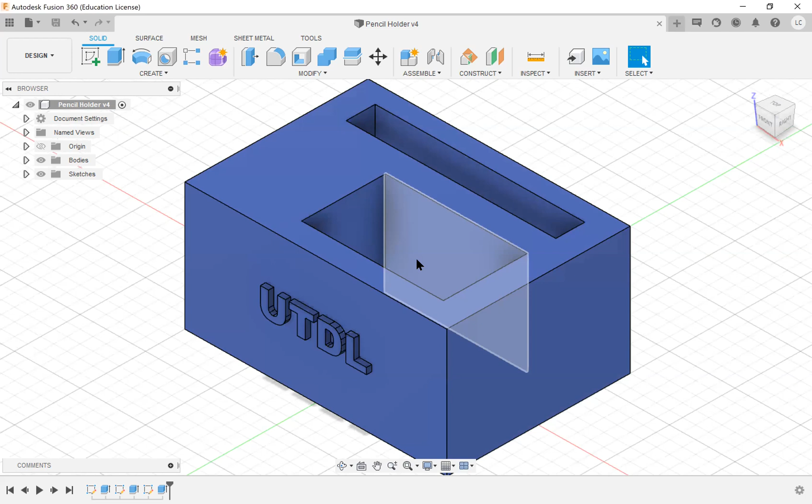And you've now created your first design using Fusion 360, using the basic features and the basic algorithm to create your designs. So you can apply these same steps to any models you want to create, and it'll be incredibly helpful for the design-a-thon coming up during second semester.

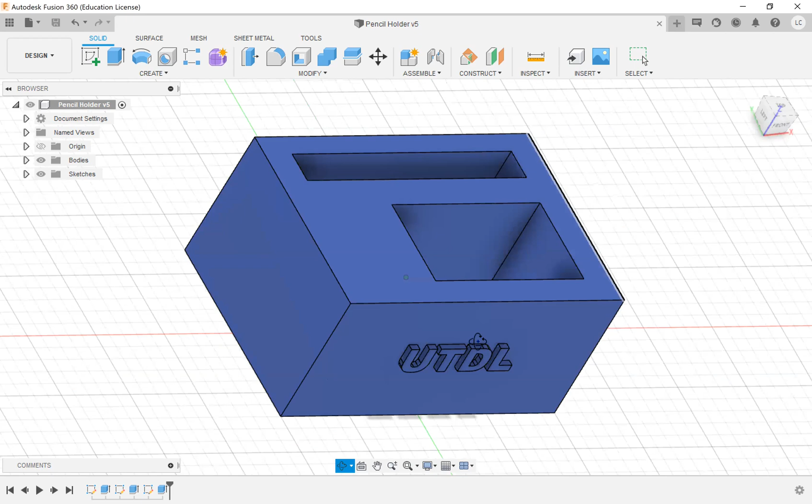Now, if you are interested in having this 3D model printed so that you have something tangible, there will be a 3D printing workshop in the upcoming weeks that will teach you all about 3D printing. I highly suggest you attend that so you can learn the skills and be more equipped to print out your 3D models that you created today and that you'll be creating in the future, so you can have tangible prototypes and models that you've designed yourself.